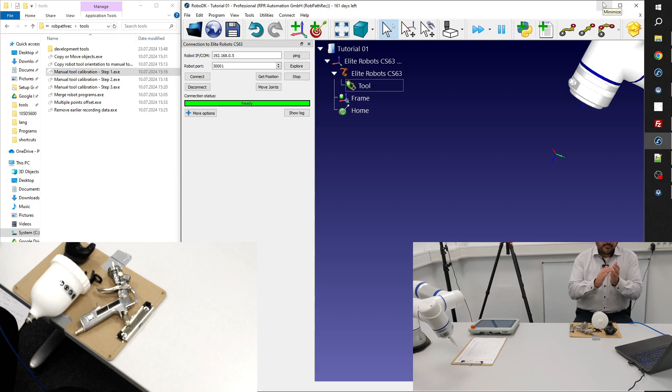As you can see, I have a spray gun in front of me, a normal one, what you can get from everywhere. The brand is not important. We just 3D printed a kind of adapter to this spray gun.

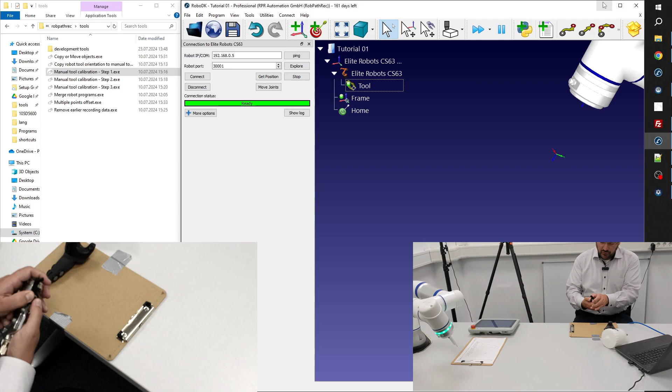You can solve this kind of problem with any other method you find well. The only requirement is that the position of your holder, if you fix it on your manual tool, should be exactly always the same as what you are using for the initial calibration.

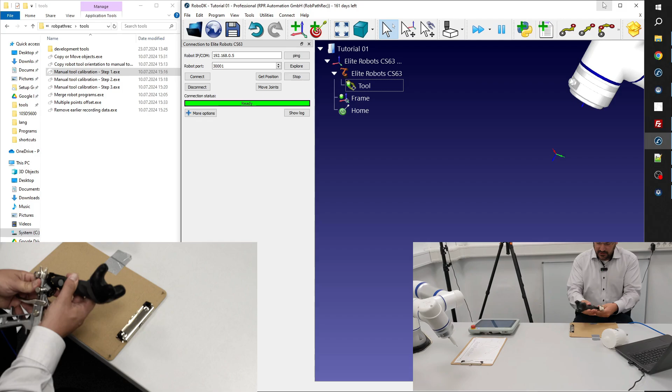In this case, as you can see, I just fit my pen into the spray gun. And why am I doing so? Because I will teach you how you can set up and save this spray gun with our pen in the Easy Automator app.

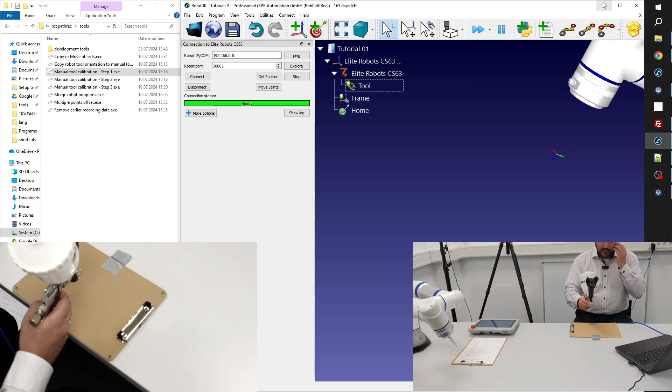And then you can really make any kind of manual processing. You can record all of the movements. You can even record the commands, which we already shown you how to do this. And this way, you will be able to record complete manual processes, and you can just transfer it to the robot, and the robot will complete this task for you in the future.

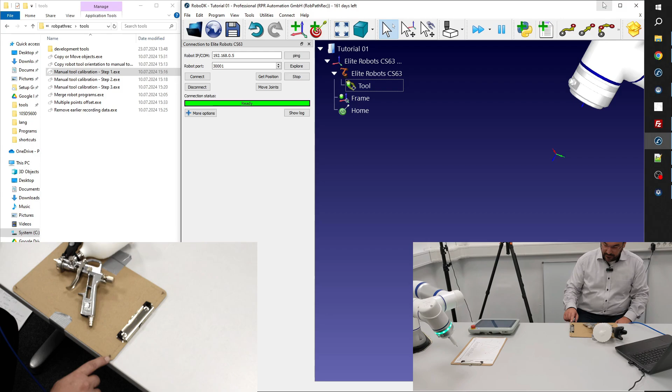It's very important that I have applied some nails into the openings at the origin X and Y. Why have I done this? Normally, if we have the pen only in our hand, then I can put it to any kind of opening as the definition points of our coordinate system.

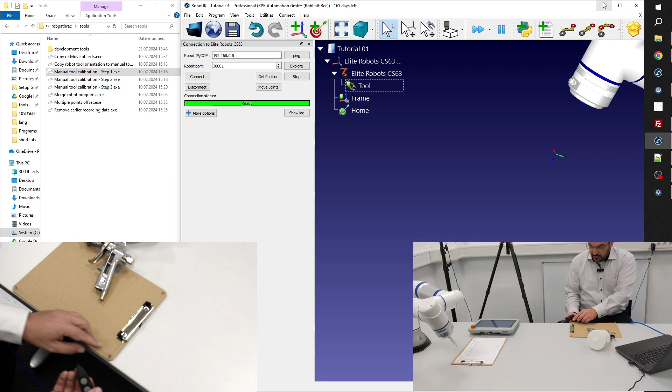Okay, but right now I don't have this tip, so I just replaced it. Instead of a hole, I have a tip, and the hole on the spray gun can be fitted to this.

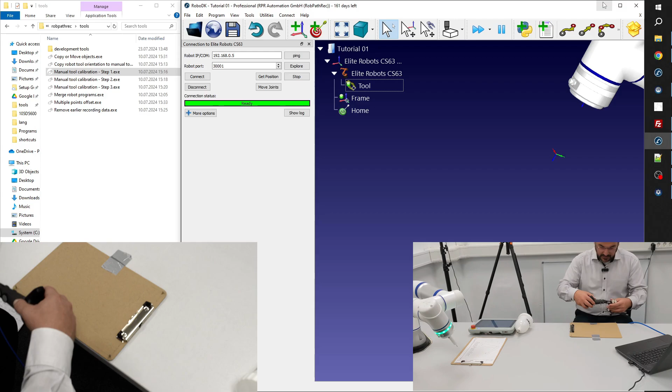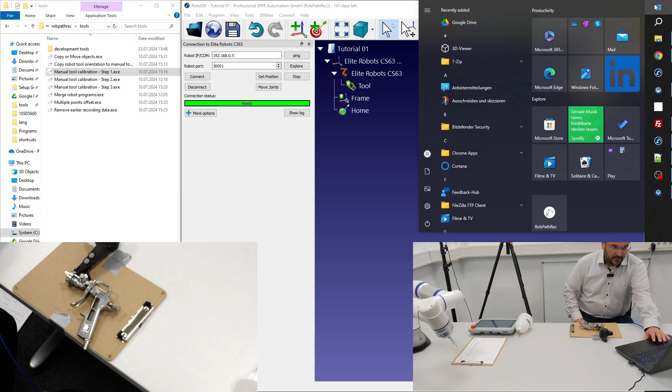After the installation, you will have a couple of executables which you might find in your start menu, in RobPathRec, or later in the Easy Automator folder.

But you can navigate anytime to see RoboDK, RobPathRec tools.

At this point, this is important to mention: for all of these executables, you have to have a valid license, which is not used at the time of your usage.

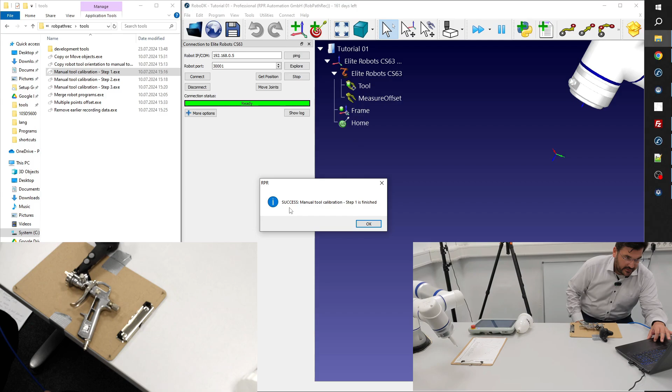And here you can see this is the manual tool calibration step 1, which I just simply execute. And you see that something is happening in the background, which is quite good. And you can see we have added a new tool called measure offset, and we have success. The manual tool calibration step 1 is finished.

Okay, as next, please open up the RobPathRec or Easy Automator app. For this, you have to have the RoboDK file open, what you are using, and you have to have a valid connection at least with one base station, so the VR app must run and must be connected as well.

I just start the software, and here just hit options, and instead of pen, please choose the tracker only option. Just minimize this, not close, but minimize, and I just hit save.

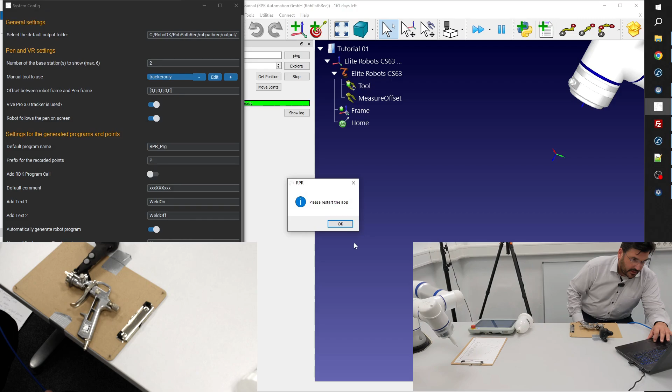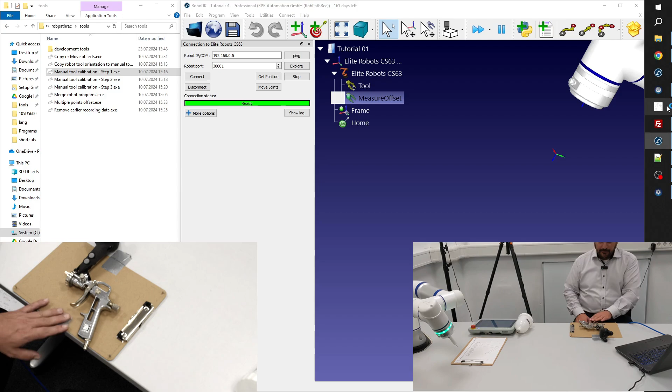Okay, at this point, we have to use as an active tool the measure offset, and I just start my app again.

And we will have to do a manual recording of some points to define the tool center point of this spray gun. And we will do this in the following way. So we just hit start recording, and this is the usual option what we have to do here as well.

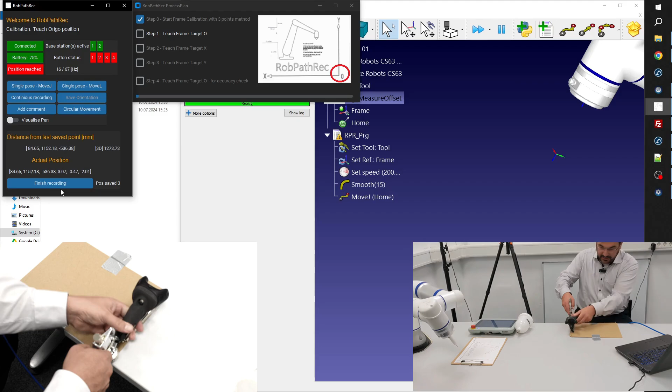So I'm just coming here and pressing the one single point button. Then I'm coming to the X. I'm just looking for the very middle of the spray gun on the nail. I just found it.

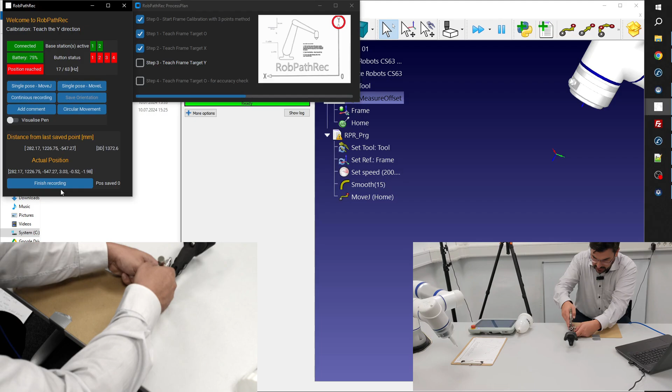And try to have the same orientation at least. So please don't turn around if you can manage this, so that you don't get any big failure message. And please don't worry, this is a one-time action.

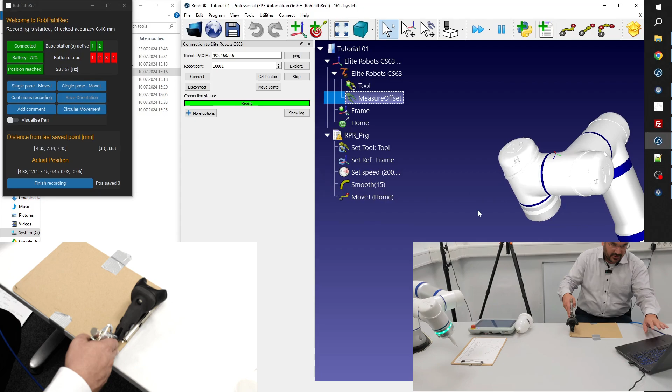Okay, just found it. Just coming back so you can see that the robot is moving around. Please don't be irritated by the robot movement. The accuracy check is higher than 5 millimeters. This is completely normal at this stage. It's not an issue, and right now we don't do anything.

We will just record a couple of points, hitting or pointing exactly in the middle of the spray gun.

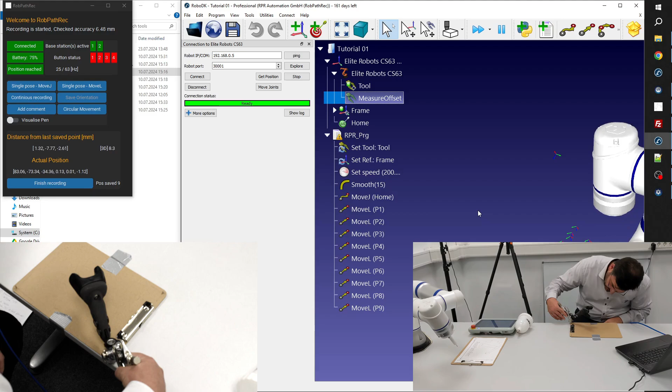Oopsie, I have to come back again. It might be beneficial maybe if you would use longer nails at the moment. So I will use these 12 points. At the moment, this should be fine enough.

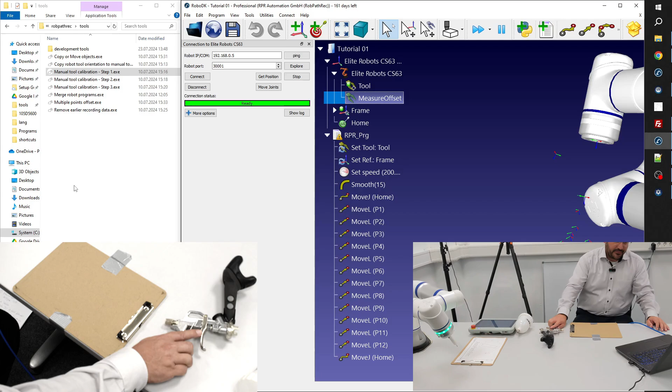So then I hit finish recording. For the next step, we will define the tool TCP of this tool by the points which we measured here.